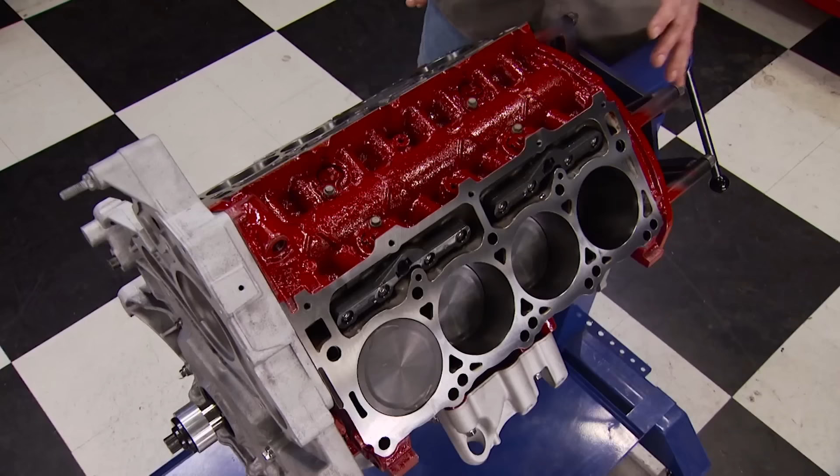Now this engine is receiving twin turbos and it's going between the frame rails of the PowerStop Ultimate Challenger Sweepstakes giveaway that Mark and Tommy are assembling down in Detroit Muscle. Now they want to see around 800 horsepower at the tires, and this is the foundation that'll get them there.

Second up, we're going to get technical. We're going to show you a couple of things that you see us do around here that you may or may not know how to do yourself. So we're going to take the time and educate you on some procedures that every gearhead or hot rodder should know.

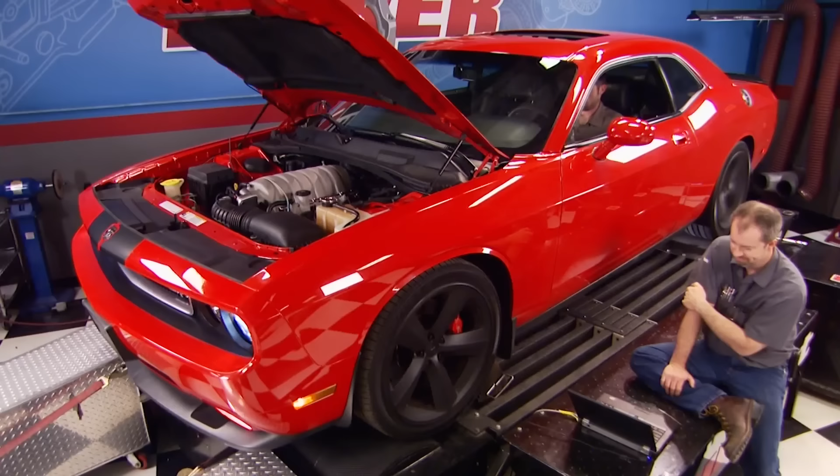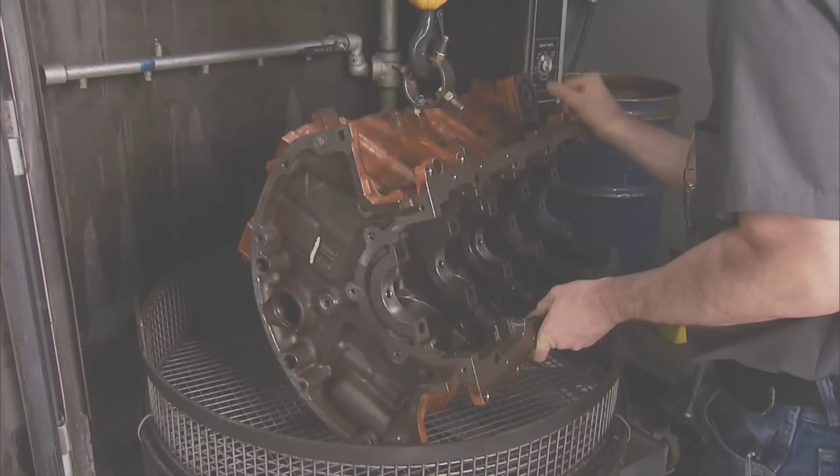In case you missed part one of the Hemi build, here's a look at what happened. We removed a 6.1 liter Hemi out of a 2010 Dodge Challenger SRT8, tore it down to the bare block, and shipped it out to Sam Tech. When it came back, we washed it and got started with assembly.

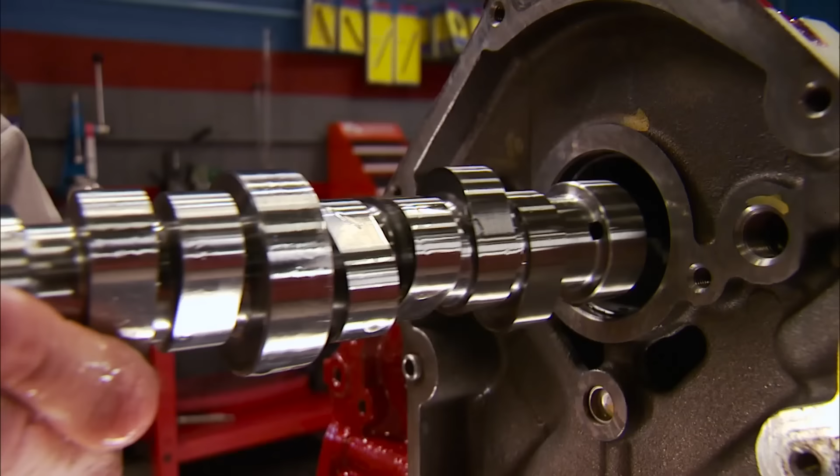A forged Eagle crank went in as the backbone of the build, along with their H-beam rods and forged Mahle pistons. We chose a catalog hydraulic roller cam from Summit Racing and linked it to the crank with a Howard's double row timing set and installed a new Melling oil pump. Mopar Performance lifters went in with new retainers, and the front timing cover went on.

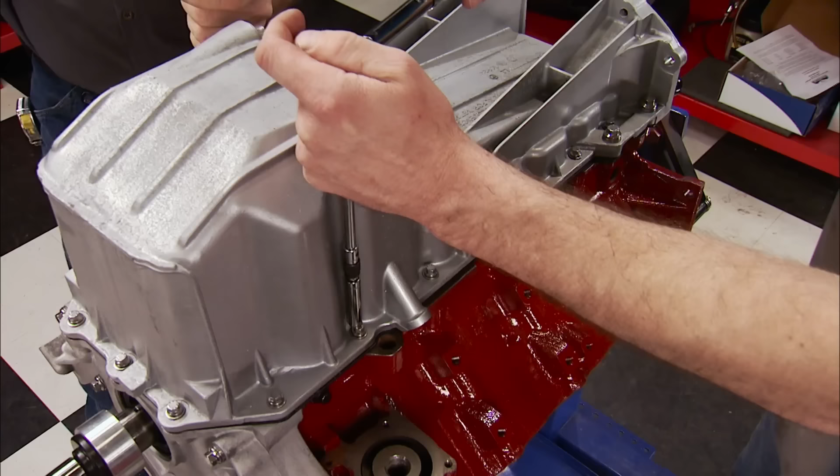Underneath, we dropped on the windage tray pan gasket combo, the oil pump pickup, and sealed the bottom up with the factory pan. Now let's talk induction, starting with the cylinder heads. These are the stock Mopar castings, but in the right hands can be turned into pieces that are comparable to the best aftermarket ones. We sent these to Tony Bischoff at BES Racing, who has a proven reputation for great achievements and records when it comes to making big horsepower.

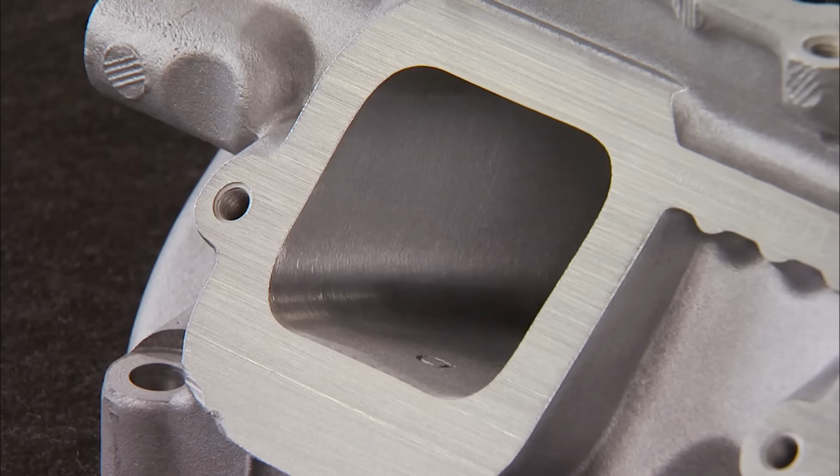These received his signature CNC magic, plus they were meticulously hand finished. They were assembled with a spring package that complements our valve train. They also received a custom valve job and were sent to us ready to be bolted on the engine. Let's have a look at what that magic yields.

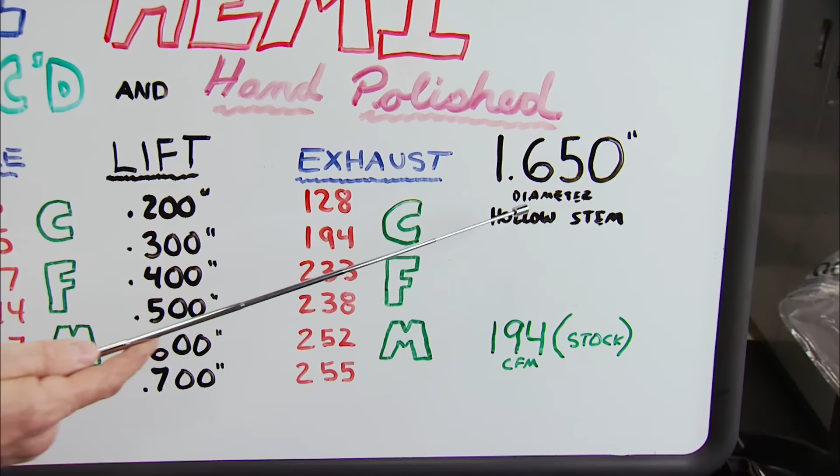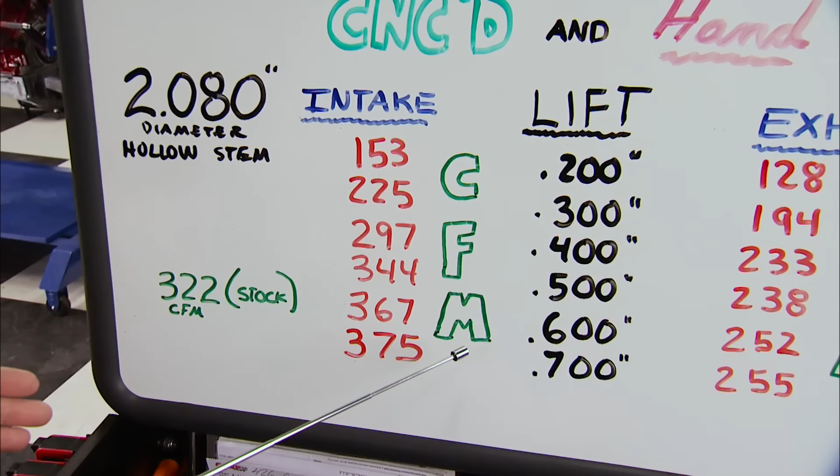Our reworked castings still utilize the stock hollow stem valves, which measure 2.080 on the intake side and 1.650 on the exhaust side, but it sure doesn't hurt the flow any because CFM is improved throughout the entire range. For comparative purposes, our stock port flows 322 CFM at .600 lift. Our new port flows 367 CFM, which is a 45 CFM gain.

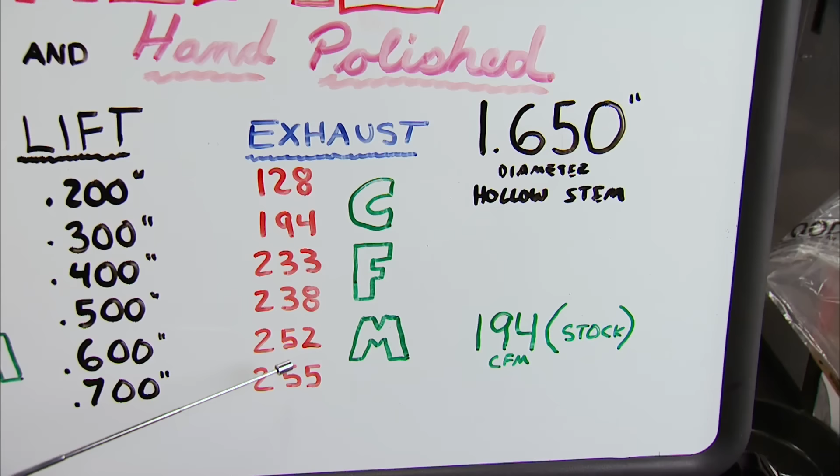On the exhaust side, our old port flowed 194 CFM, the new port 252 CFM for a 58 CFM gain. That's a massive improvement of flow across the board, and coupled with our planned pressurization, this Mopar is going to crank out some big numbers.

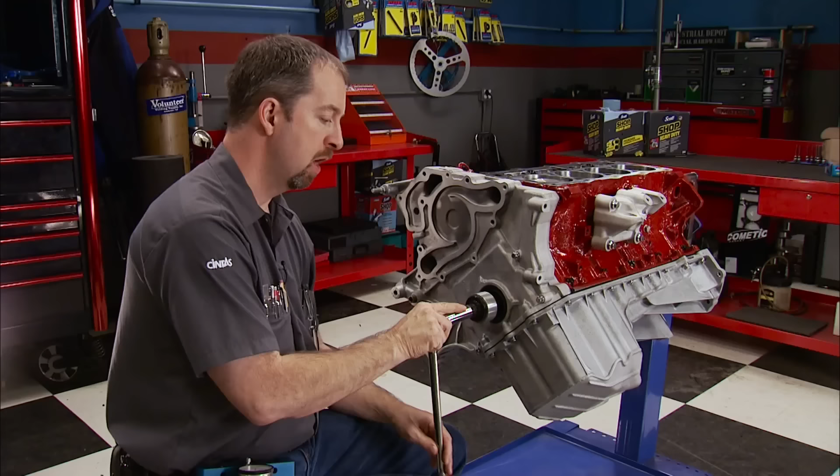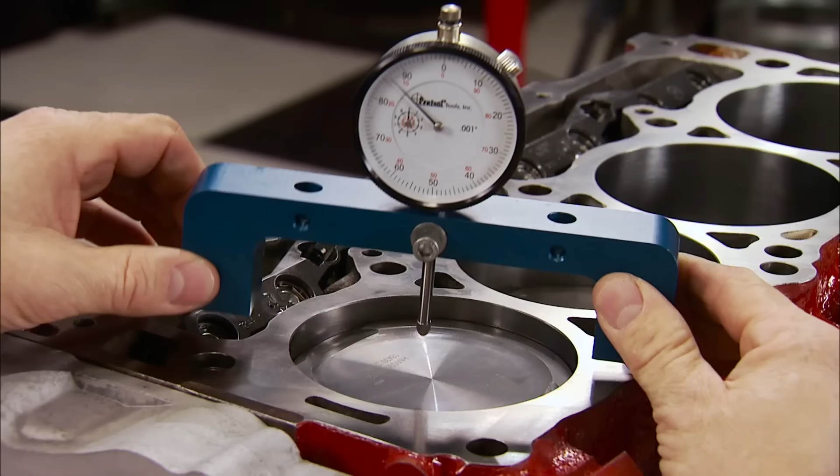Before the heads go on, a very important dimension needs to be checked, and it's going to determine whether the piston is above or below the deck surface at TDC, which is going to dictate which head gasket we're going to be able to use. First, set up the magnetic base dial indicator over the direct center of the piston. Now rotate the engine until you find the breakover point.

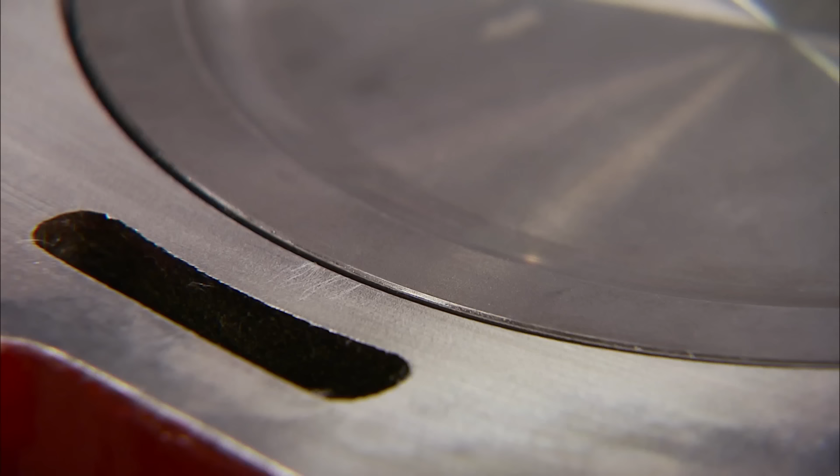Next, move the gauge to the deck of the block and make sure it's zeroed out. Move the gauge to the outside edge of the piston and take a reading. Now do the same on the other side. Those two numbers will be the same if the piston is squared up to the deck surface. These pistons are out of the hole 10 thousandths.

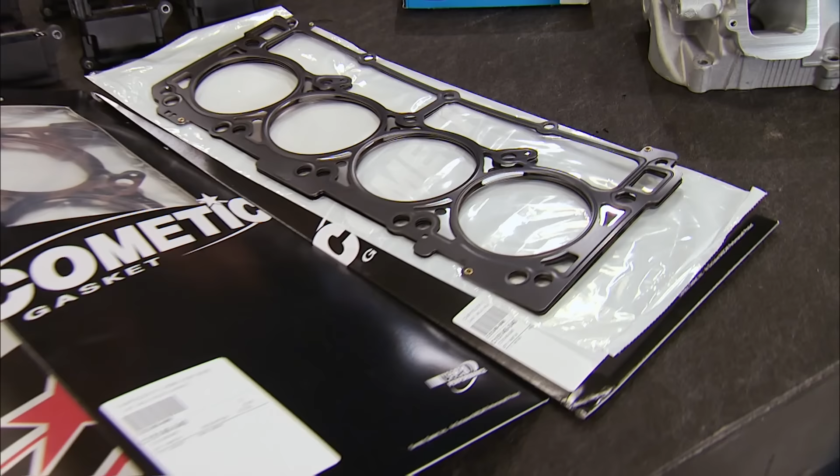Head gaskets are an important topic, especially in a boosted application, and these Cometic MLSs are our choice, hands down. They come in thicknesses from 27 thousandths all the way up to 120 thousandths to accommodate any combo. Now, when we come back, these gaskets and these cylinder heads are getting put on that short block.

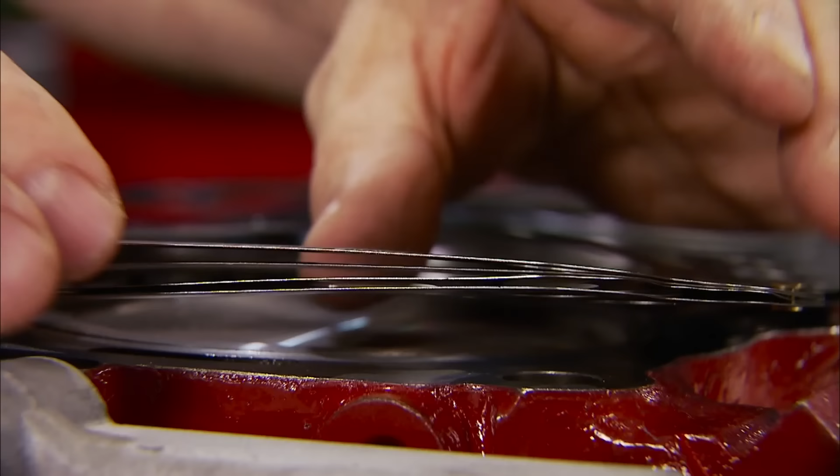We're continuing on with our 426-inch stroker Gen III Hemi, and we're going to dress it out to long block form before it goes down to Mark and Tommy in Detroit Muscle. But for right now, it's time for some head gaskets. Remember, our pistons were 10 thousandths above the deck surface, so we're using a 40 thousandths compressed thickness Cometic MLS to seal this one up, making our calculated compression ratio 10.4 to 1.

Our reworked heads can now be positioned on the dowels, and ARP head studs can be screwed into place. The Gen III Hemi has a specific head for the driver and passenger side. Make sure you mark them when it's coming apart and get the correct one back in its respective place, or it will just cost you time later on. ARP Ultra Torque is placed on tops of the washers and threads. Finally, the nuts are going to be run down and torqued to 105 pound-feet.

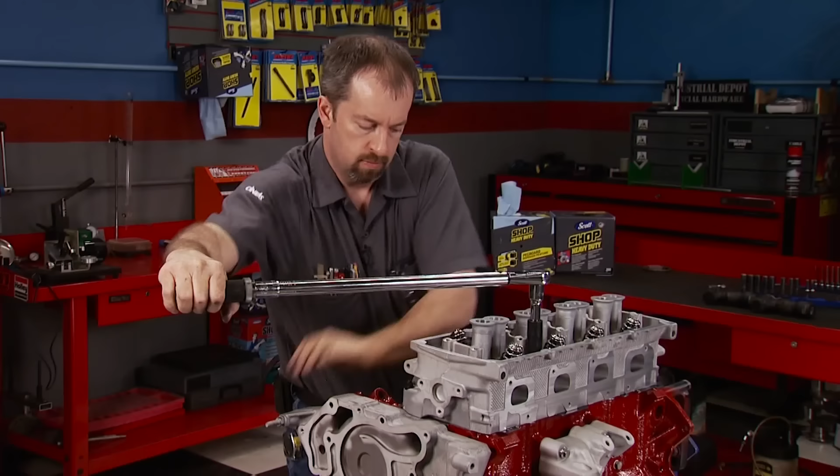Same process for the passenger side, and we marked it as well. Now it's time to see if the factory push rods will work. Now, just because you've got a new aftermarket camshaft doesn't necessarily mean you need new push rods. Now, with that being said, lift and duration don't directly affect the push rod length. Now, here's something else. Don't just listen to what somebody else has to say about the length of push rod you need for your engine.

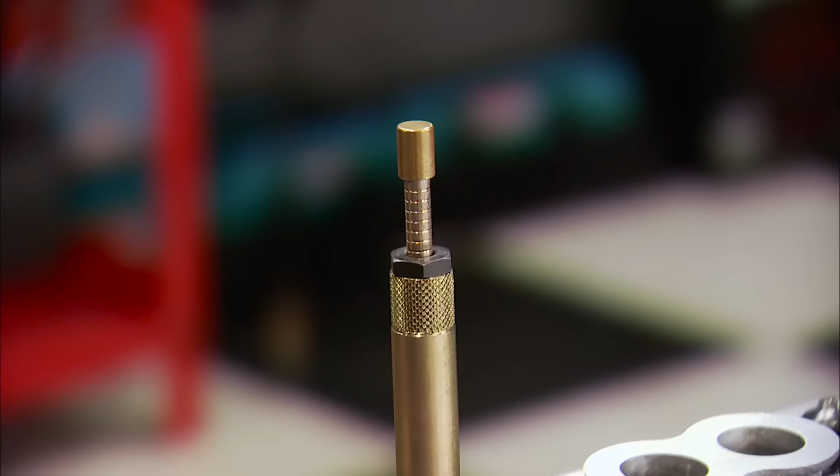There are several other factors involved, like how much the block and the heads have been milled, the thickness of the head gasket, as well as the length of aftermarket valves. They all directly affect the length. We'll roll the engine to work on the number 1 cylinder. Now, drop in our Matco extended TDC indicator and rotate the engine so the number 1 cylinder is at TDC on the compression stroke. Drop in our adjustable push rods with them as short as possible.

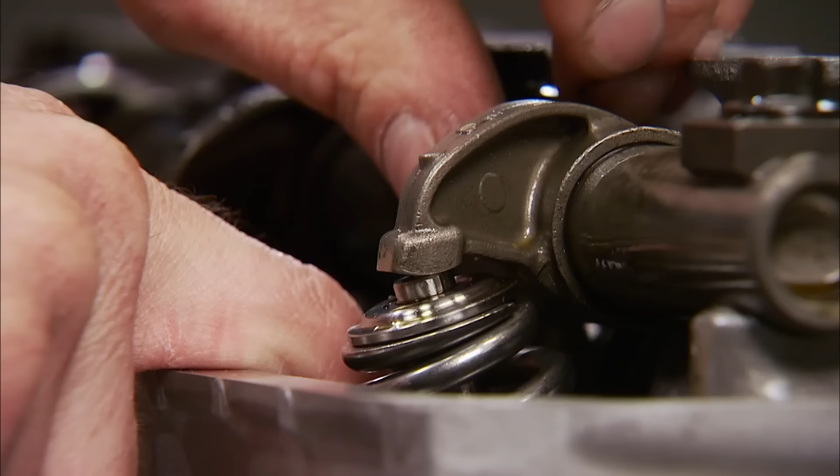Now lay the rocker shaft assemblies in place and tighten them up, making sure the push rod does not contact the rocker. Extend the push rods until they make contact with the rocker. This is called zero lash. Since this is a non-adjustable rocker, we can now remove the assembly. Pull both push rods and we'll take their measurements using a large 12-inch digital caliper.

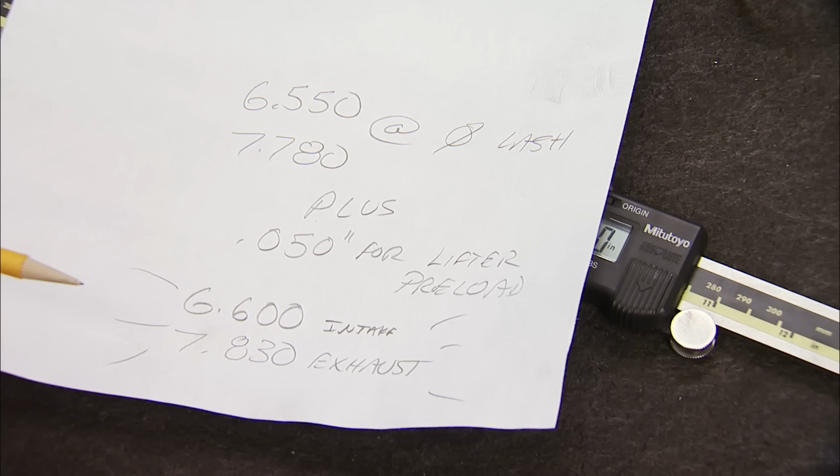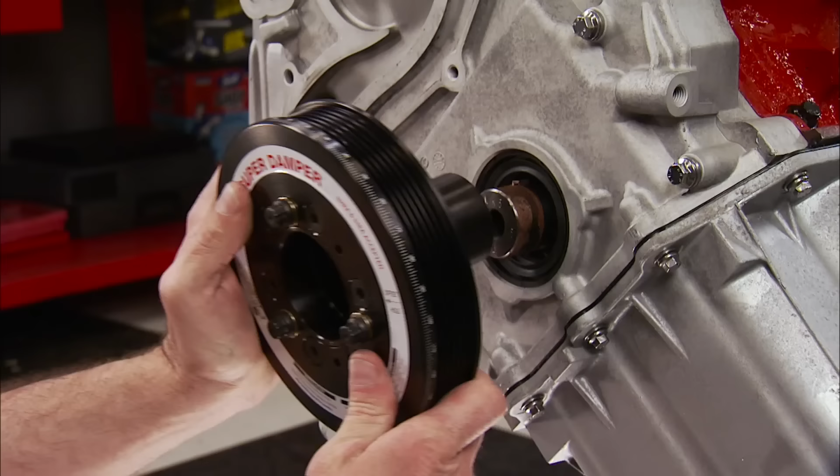We have 6.550 on the intake, 7.780 on the exhaust. Now we need to add 50 thousandths for lifter preload. Our final is 6.600 on the intake, 7.830 on the exhaust, so those are the two we'll order. Anti-seize can go on the crank snout and on the inside of this ATI balancer we got from Summit Racing. Since the Eagle crank is keyed, a new balancer was in the parts list. It's torqued to 140 pound-feet.

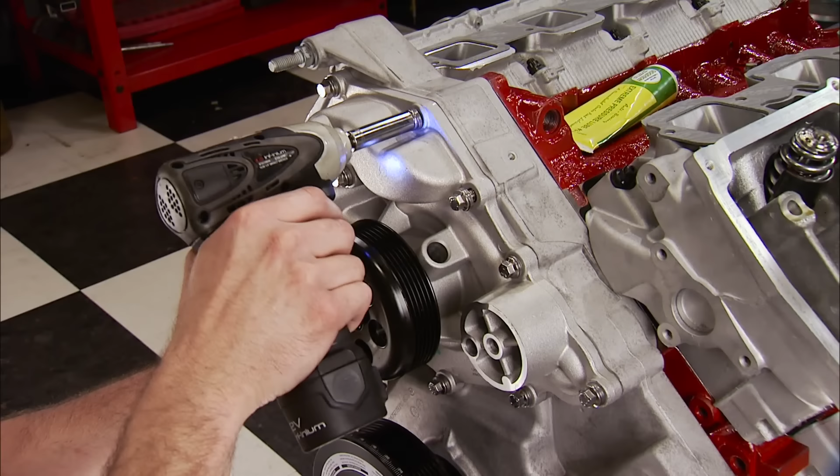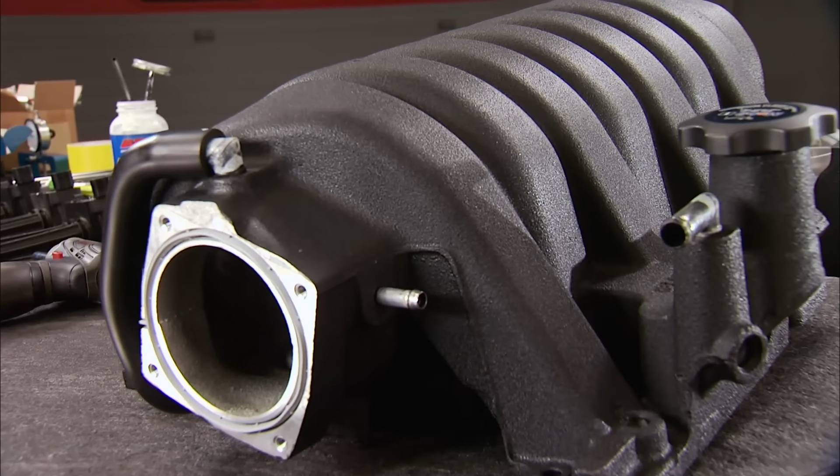A new water pump is a must in engine builds like this. We don't want to take any chances when handing it off to Mark and Tommy. ARP fasteners from the accessory kit hold it on. To give the engine a different appearance, we covered the intake manifold in VHT's high temperature Wrinkle Plus textured coating. It's good to 350 degrees. New Cometic gaskets will make the seal from it to the cylinder heads, and more ARP fasteners will cinch it down.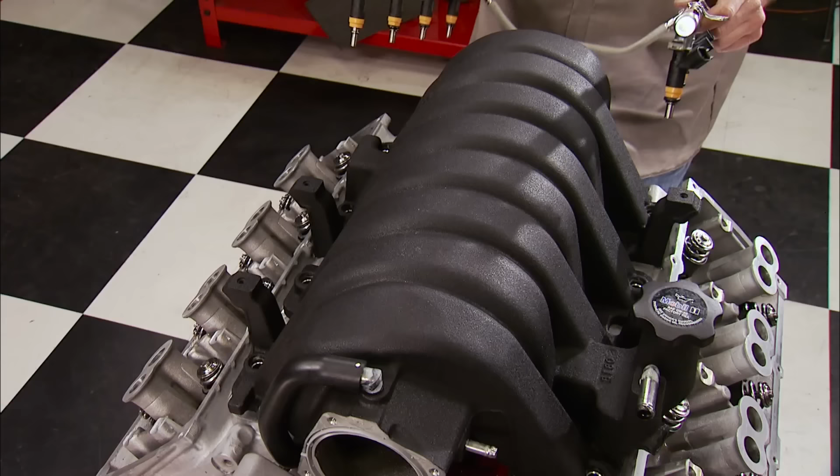We're putting the factory injectors back in for now. Mark and Tommy will change them when they install the Hellion turbo system in their shop. We're just plugging the holes. A new thermostat goes in now. It's the factory 203-degree unit. The sensors are next, starting with the cam sensor. Now the crank, knock sensors, oil temperature, and oil pressure. Now the water temperature. The factory throttle body goes back on, along with the belt tensioner and the idler pulley.

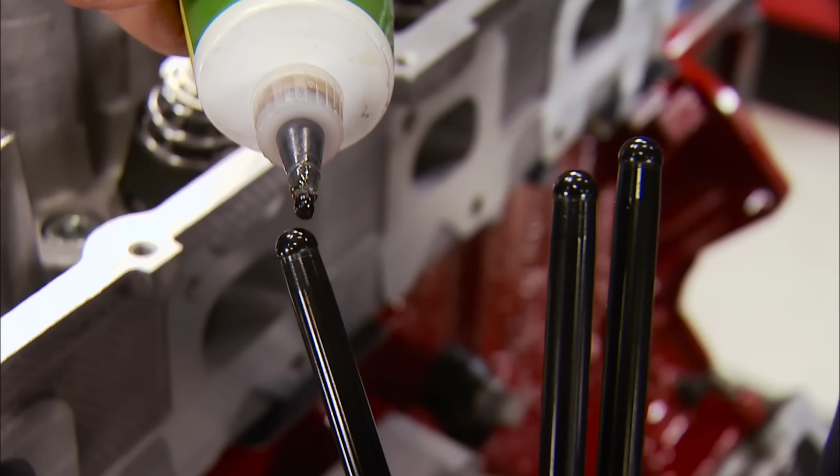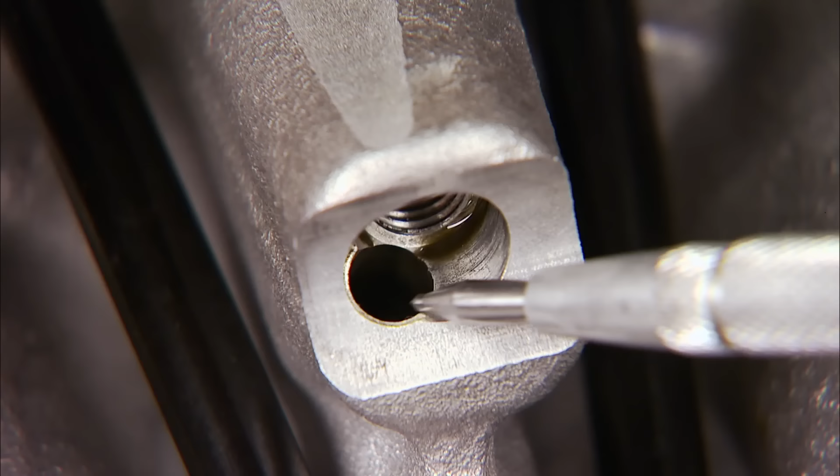Trend Performance has been our pushrod source for the last couple of engines we've built. They are hands down one of the leaders in innovation when it comes to pushrods, wrist pins, and valve train testing and evaluation. These have a 5/16 inch diameter and a .105 wall thickness. The ball ends are factory OEM Hemi size at 5/16. The rockers are oiled through these small holes in the stands that are drilled into the heads. The intake shaft assemblies can go on now and torqued to 25 pound-feet, followed by the exhaust shafts that are torqued to the same spec.

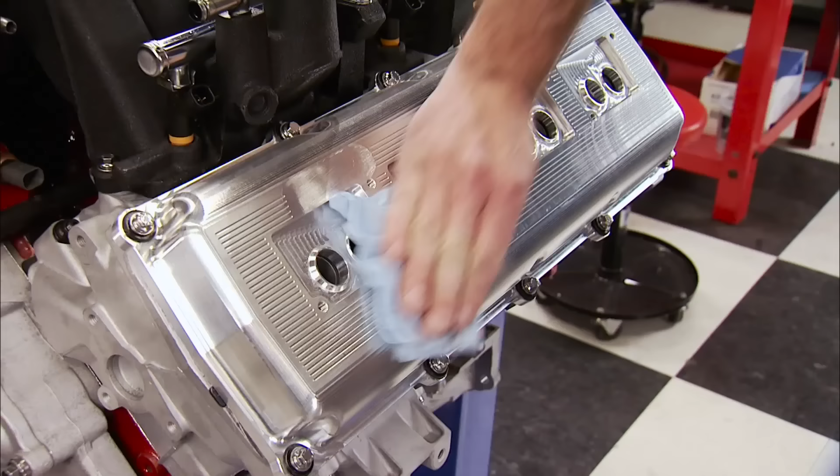These are the real reason we painted the intake manifold. We wanted these billet valve covers to catch your eyes as much as possible when you saw them. This was a really fun build, and Pat and I are super excited to be a part of it for a couple of different reasons. The first one is it's getting twin turbos, and it's going to make some really big power at the tires.

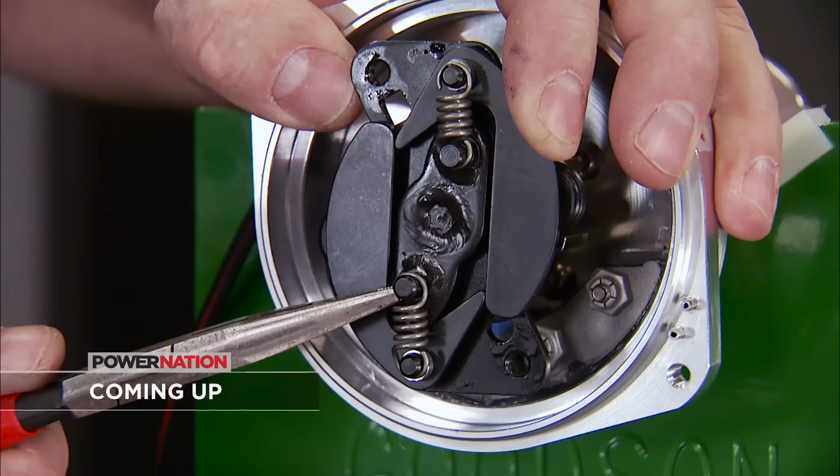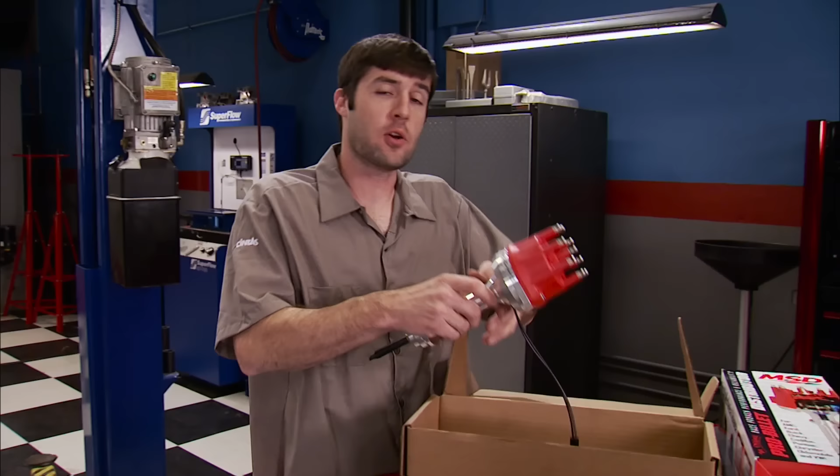Like they say, timing is everything. Coming up, how to maximize it. Every part of an engine, from bone stock to full race, is important in its function, and distributors are a subject we get a bunch of questions on. So today we're going to slow it down and go in detail on some how-to tech on the engine's nerve center, so pay attention. Ignition timing is obviously a crucial part of engine tuning, and having total control of the timing helps maximize an engine's output. Now, the distributor is what dictates when the energy fires the spark plug. So today, we're going to show you how to lock one out.

Most distributors you deal with have a timing curve in them. That means when the engine is idling, the timing is set at its minimum position. As the RPMs are increased, weights and springs in the distributor move the position of the rotor to advance timing, sometimes as much as 24 degrees.

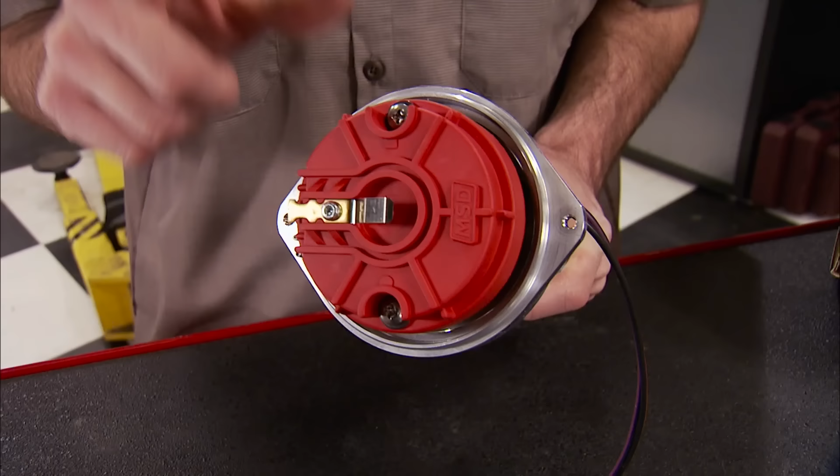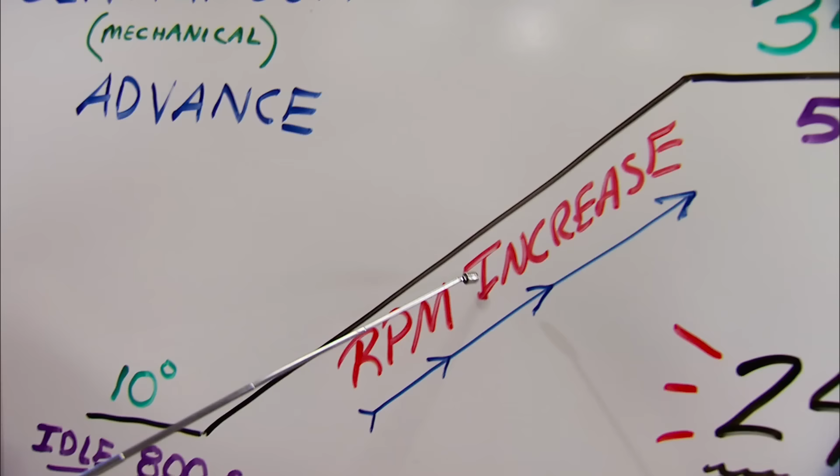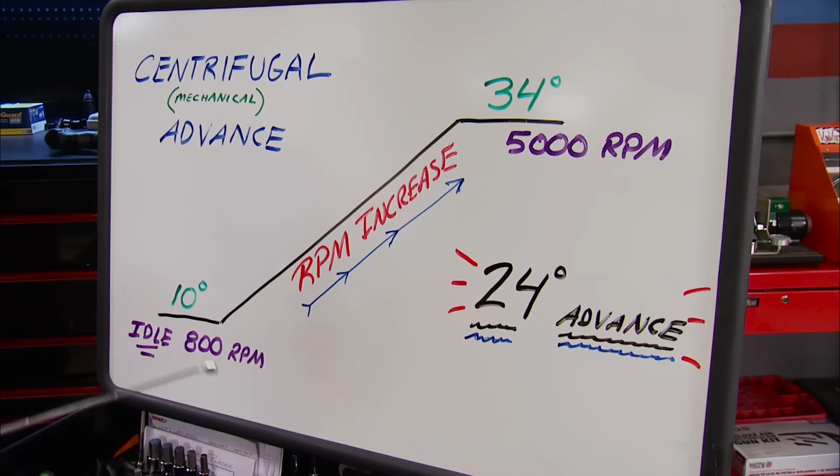Let's say, for example, you have an engine that checks at 10 degrees of ignition timing at idle, say 800 RPM, and then you increase the RPM watching your timing mark until the advance levels off, say 5,000 RPM in our case, and it now checks at 34 degrees. That means you have 24 degrees of centrifugal or mechanical advance in your distributor. Different distributors will vary from that up or down, but it's important to check yours to see how much yours has in it.

The vacuum advance on a distributor is there for the sole purpose of emissions and drivability, pulling additional ignition timing in at light load and partial throttle situations like normal everyday driving. That's why it's important to have it hooked up to a manifold vacuum source instead of a ported vacuum source.

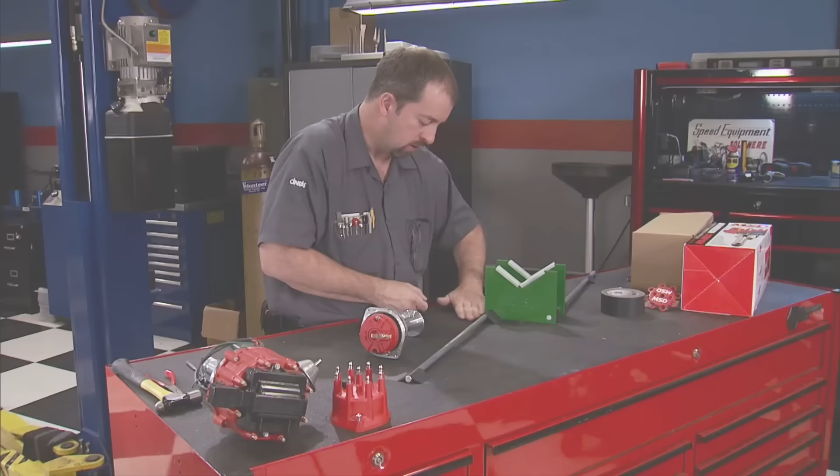We like to have total control over the timing in the engines we build. Most are high-performance builds that are built for a specific purpose. MSD distributors have a provision in them to lock the distributor out if you want, and most racers will want to control their ignition curve electronically with a box like an MSD Digital 7. They don't want to rely on springs or weights to set their timing curve.

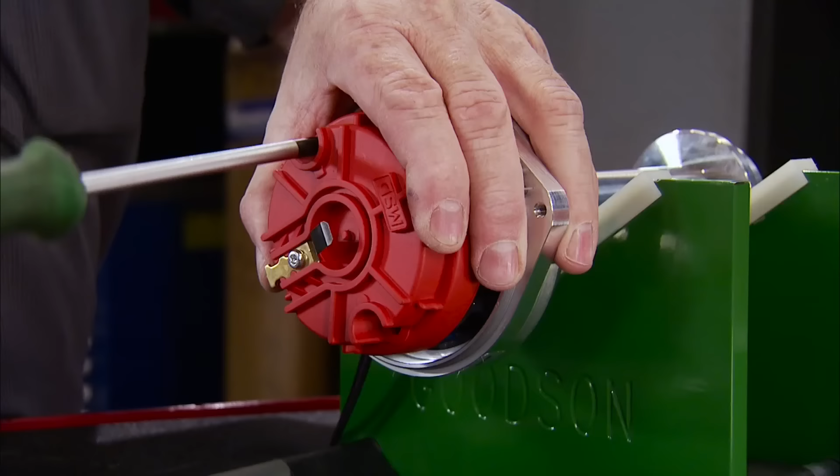The first thing we need to do is remove the rotor. This gives us access to the springs and weights. As RPM increases, the weights are forced away from the center, which moves the rotor, advancing its position. This is what we'll remove to lock out the centrifugal advance. The springs need to be removed, which is easy. Just pry them off the post.

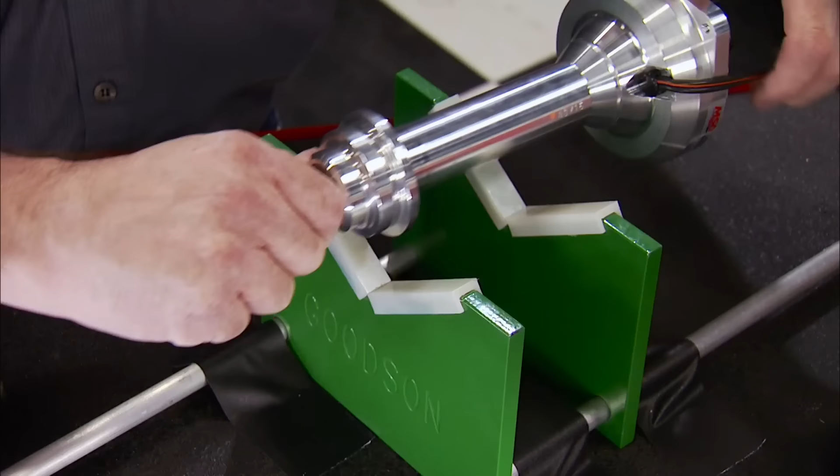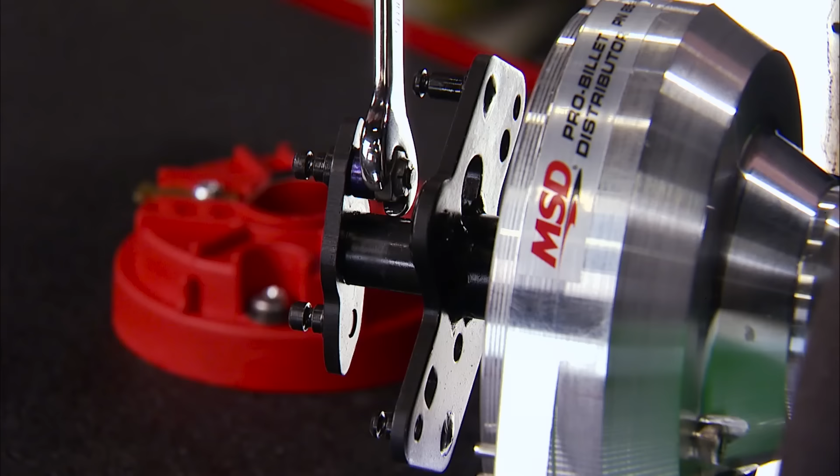Now the weights can be removed, and the roll pin securing the bushing can be tapped out and removed, along with the bushing. Back on top, I'll separate the rotor shaft from the main shaft and remove the nut and washer along with the advance bushing. Rotate the rotor shaft 180 degrees and align it with the hole on the opposite side. Secure it down. Replace the bushing and tap the roll pin back into place.

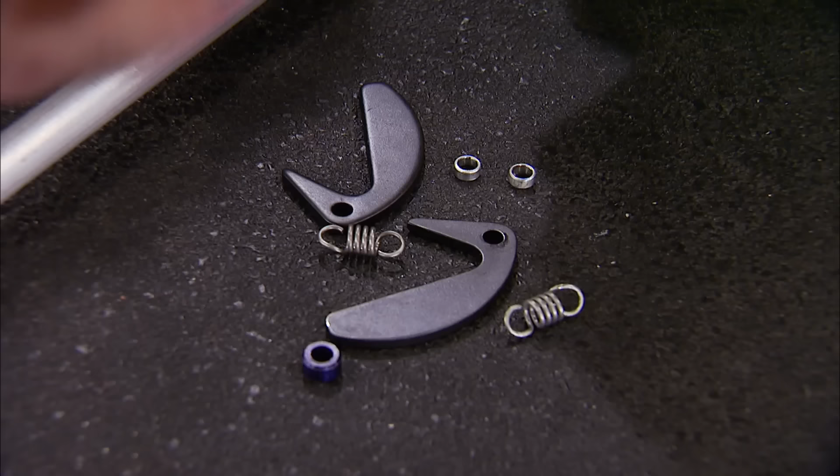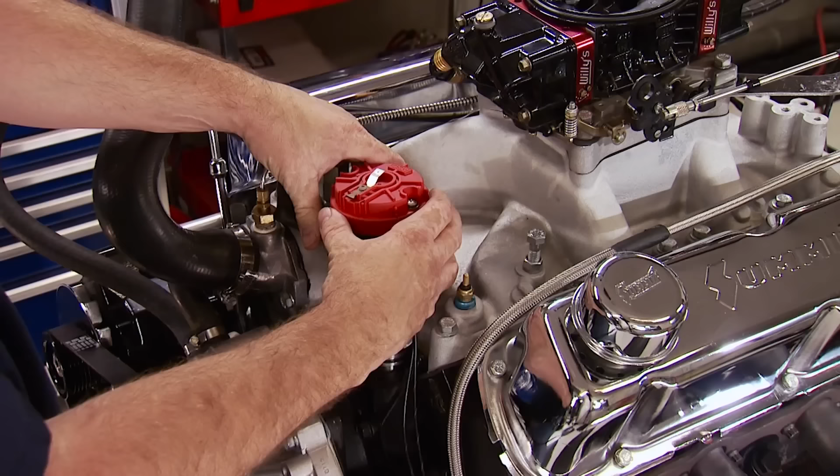With all of our unused parts left on the table, the rotor can go back on. Now there's nothing left in the distributor that will cause a timing variance at any RPM, and that's how you lock out a distributor. Now you know how to modify one. Here's an easy way to install it.

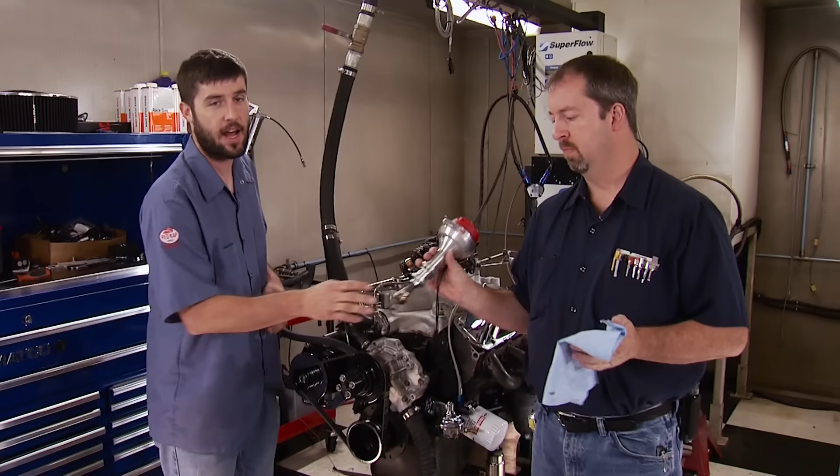Installing a distributor is a popular topic in our email bag, and most of them are asking, how do we get so lucky dropping in a distributor and getting an immediate fire up every time? Well, there's no luck involved. It's a simple understanding of positioning, and the process we're going to show you here applies to all engines that have distributors. The first thing to do is make sure the #1 cylinder is coming up on top dead center on the compression stroke. There's a couple of ways to do that.

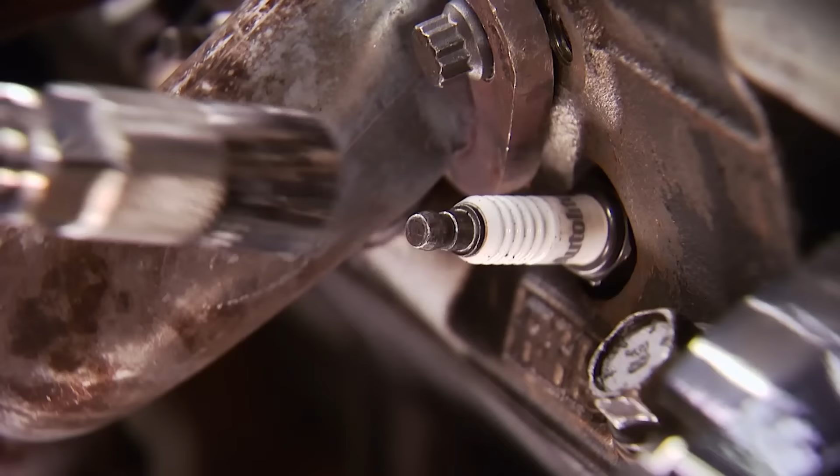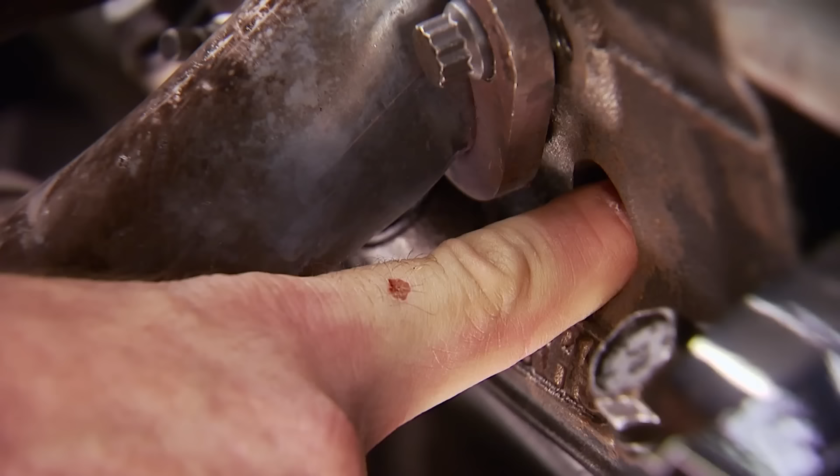The first and generally easiest is to have the #1 cylinder spark plug removed. Now place your finger over the hole and turn the engine over slowly. When the piston comes up on the compression stroke, it will force air out of the cylinder and push your finger off its seal like this.

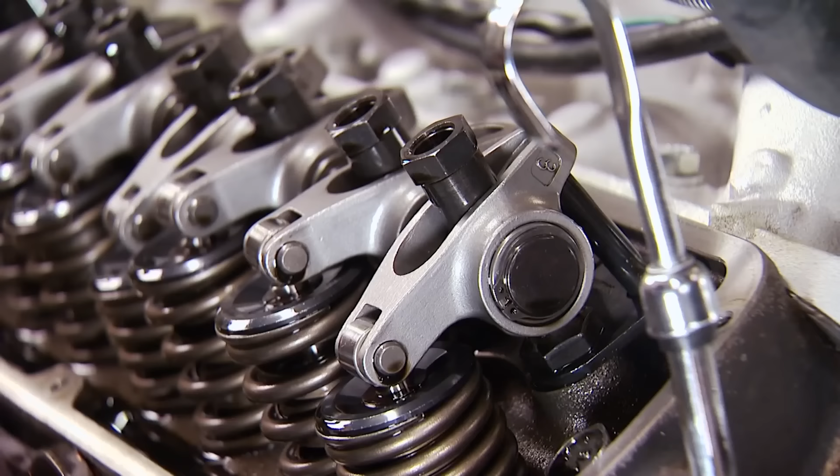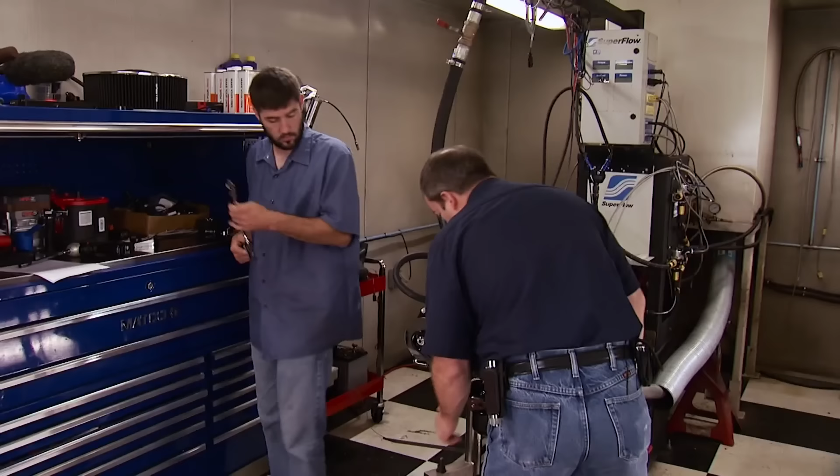The second way is more involved and requires you to pull the valve cover. When you turn the engine over and both valves are closed and the rocker's not moving, you're coming up on the compression stroke. Now slowly turn the crank to get the timing mark, or 0 depending on your balancer, about 30 degrees before on the timing pointer. To put it in simple terms, there are 360 degrees in a circle, so that means 30 degrees is a little less than 1/10 of that, which is a very small distance.

Now it's time to drop the distributor in. The important thing is to position the rotor where you want it, not where it falls. This is important for your wire routing to look neat and clean. To make it drop all the way down, all you have to do is rotate the engine and the distributor will index the oil pump drive. Then simply reverse the rotation back to 30 degrees before TDC.

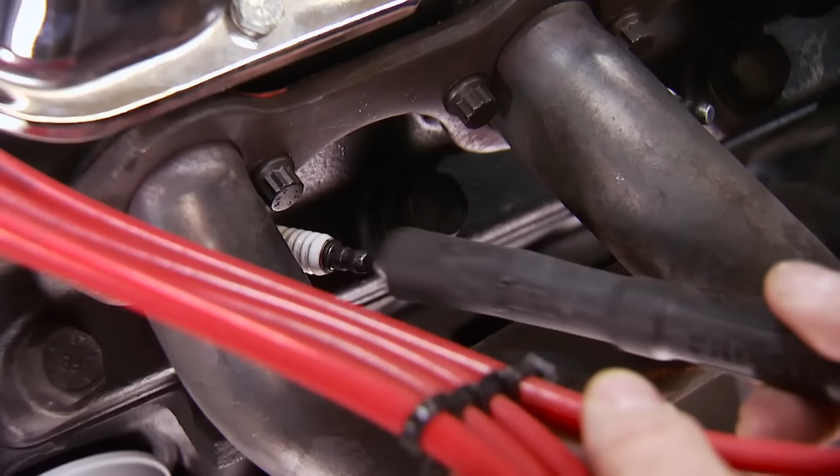Now the cap goes on. The wires are routed to the spark plugs, and here's the results. Hit her.

So all you need to do is follow that simple procedure and you'll never see flames come out of your carburetor again. Plus, it'll just make your life simpler.

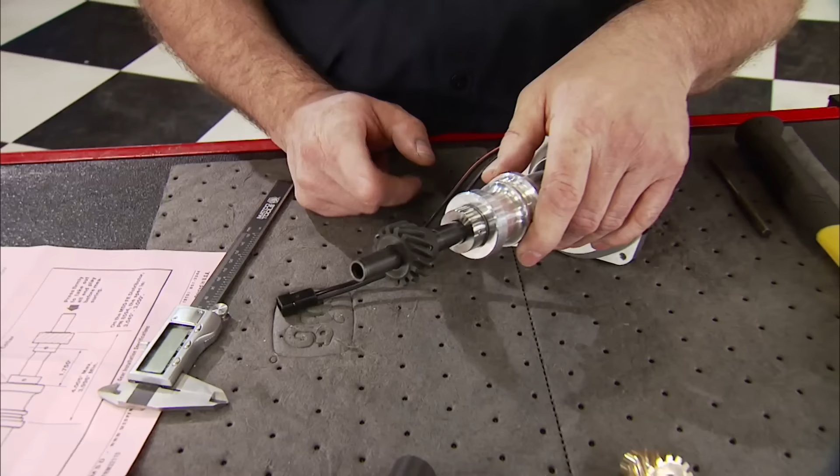One more thing about distributors. You can't run an iron gear on a steel cam. In this case, the materials hate each other and you'll get almost immediate failure on your distributor gear. A composite or bronze gear like this one from MSD will solve the problem. The bronze material is softer than the camshaft gear, allowing for a friendly mesh between the two.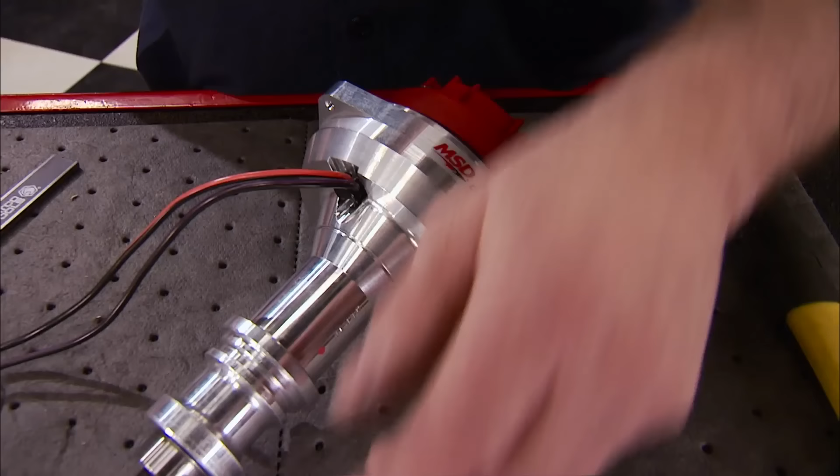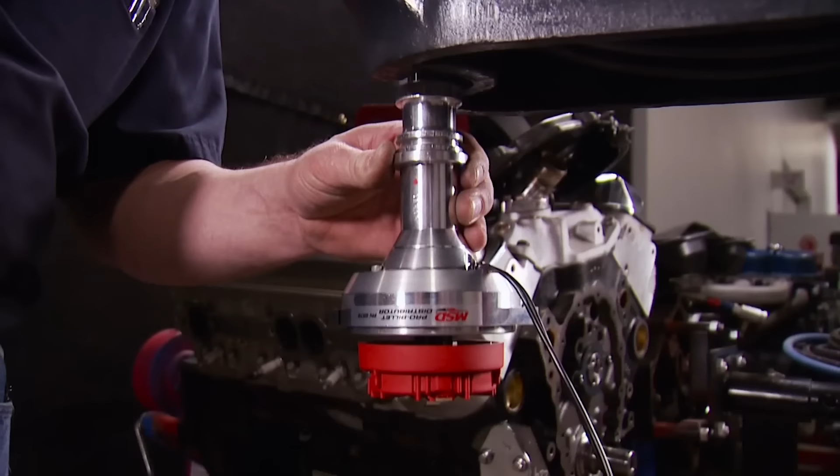The gear isn't hard to change, but its position on the distributor shaft is crucial. Luckily, MSD provides the correct dimensions for its placement on this sheet. Simply remove the pin and press it off and the new one on. Making sure it's at factory spec, drill a new hole for the new pin and you're good to go for the long haul.

Today's tech tip is going to seal the deal on any engine that you build from mild to wild. We're talking piston rings. Now, they're probably the least glamorous of all engine parts, but arguably one of the most important. They're unique in the fact that they're a moving seal under extreme pressures and temperatures, but their job description is simple: to seal up cylinder pressure.

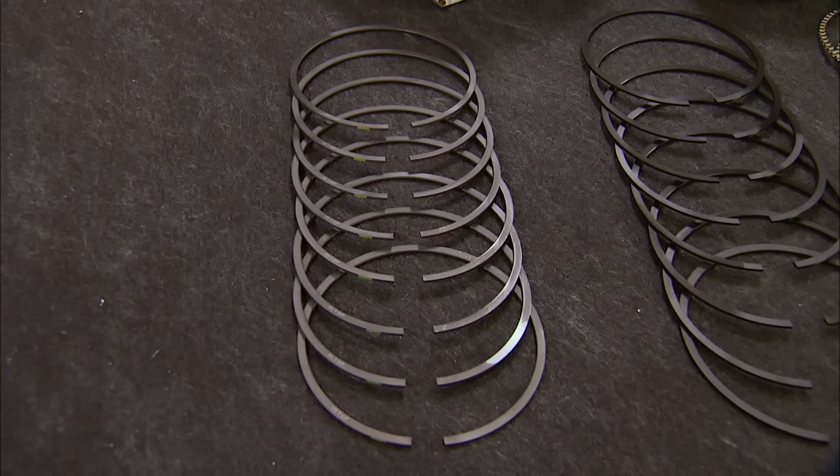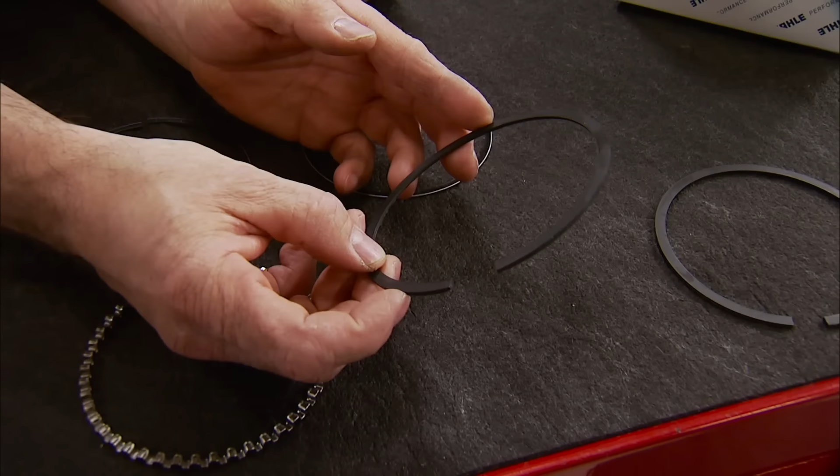Depending on the ring's application, they'll vary in design and material. Let's start with material. At its basic level, the top and second rings are constructed of cast iron. They're easy to machine and cheap to produce, and they're used in applications for very simple engines like air-cooled lawnmowers, farm tractors, and even automotive applications from the 1970s and older.

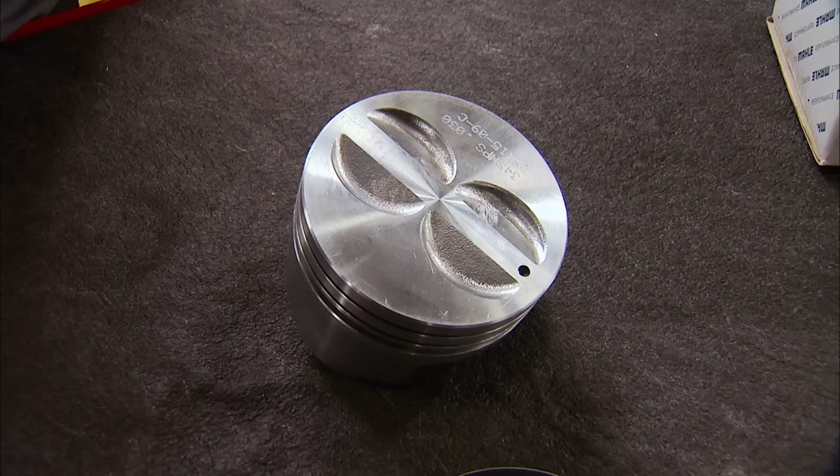The oil control ring that typically goes with those is a 3-piece design that scrapes excessive oil off the cylinder. They contain an expander with 2 outer rails, and they're typically constructed of inexpensive steel. It's highly recommended to use a ring expander to install cast iron rings. They tend to be a little fragile when installing.

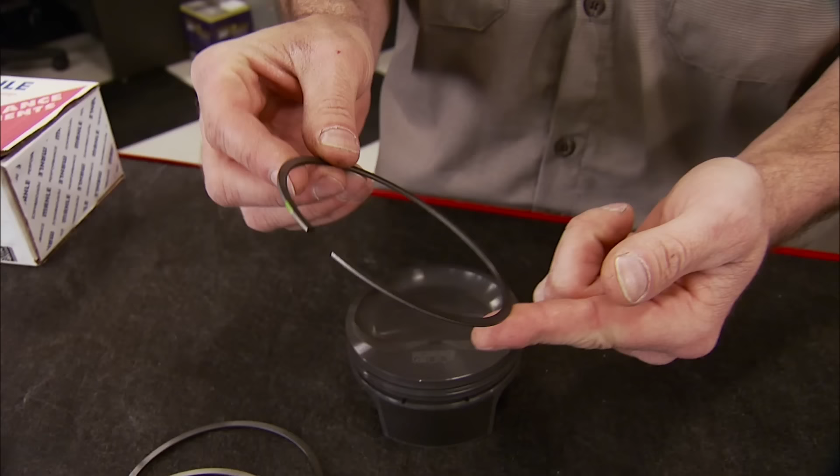Performance engines and modern power plants still use a form of a cast iron ring, but they are improved in both material quality and the addition of special coatings. They are typically thinner for less drag and are better equipped to handle the increased heat and pressure of these types of engines. Here's a look at how an early style cast top ring and a newer style one compare.

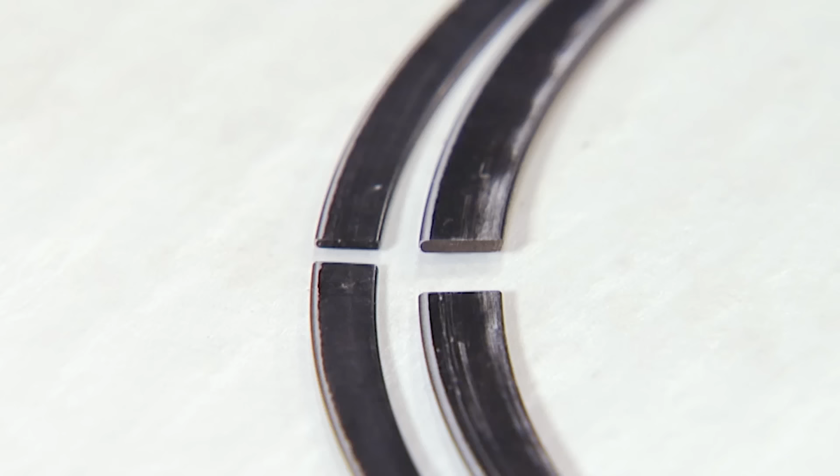Now notice the difference in the actual thickness of the ring and its radial width. Now the smaller ring has less surface contact with the cylinder bore, which equates to less drag and improved sealing. Oil rings have also decreased in size to further reduce friction, but by design they still maintain excellent oil control.

This late model oil ring set is pretty trick. It includes the same components as the early style, like the expander and 2 rails, but their thickness and width are much smaller. The late style is only 3 millimeters thick when it actually fits in the ring land. The old style is 3/16. That's a 69 thousandths difference. Now multiply that by 8 in a V8 engine and you've reduced a lot of surface area and a lot of ring drag on the cylinder, which frees up horsepower.

High-end racing engines have rings made out of more exotic materials, like different grades of tool steel, and they're designed for the most extreme applications where a cast ring will just outright fail. And ring prices vary widely from about $30 a set for a stock 350 Chevy to over $1,000 a set for a full-tilt race bullet.

The next time we talk about rings, we'll get into proper gapping, using both manual and electric grinders, plus where and how to set the gaps up properly size-wise for any given application.